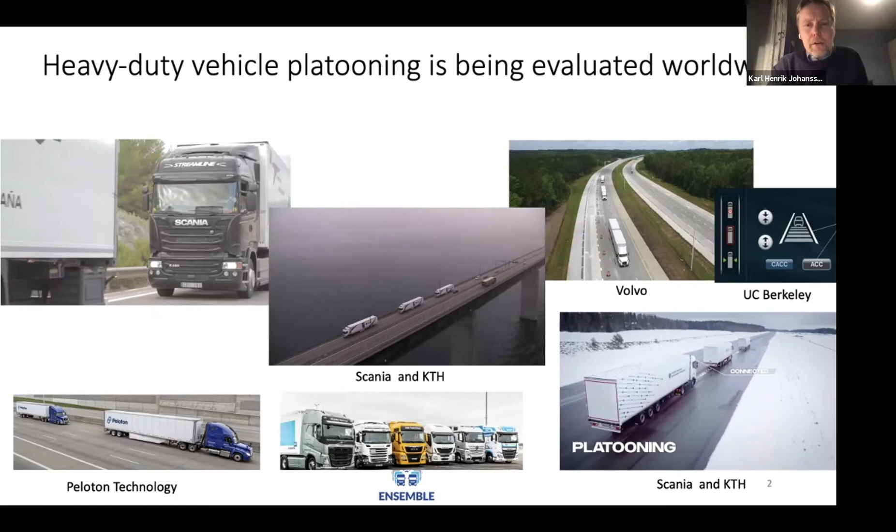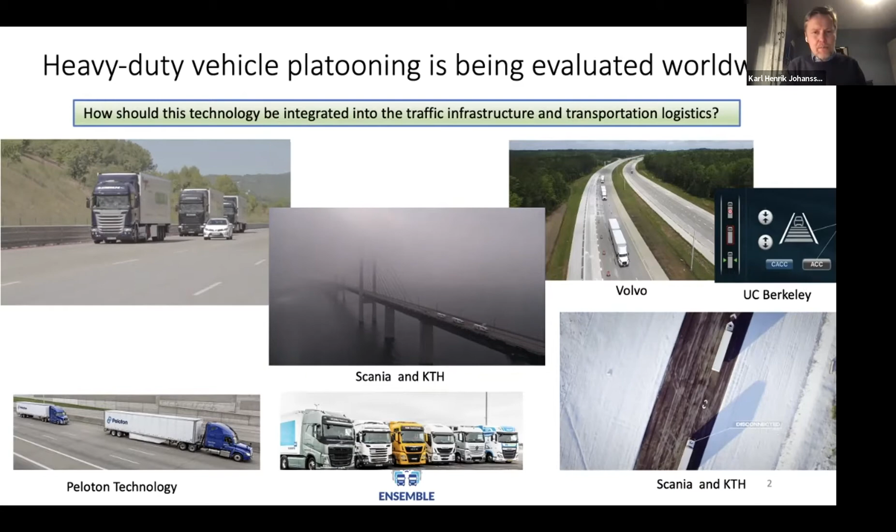This will have a little bit of relation to what Alex also talked about: how can we regulate traffic using connected and automated vehicles? The starting point for my presentation is a particular technology and a particular type of vehicle, namely trucks. As everyone in this audience knows, truck platooning has been developed for quite some time. Basically all truck manufacturers around the world are working on this technology and have been demonstrating it. We've also been interested in that for a number of years, not only the issues about how to get the trucks close together and run at high speed to save fuel, but also in going further to think about where we go from here. So now we have that technology - how should that be integrated into the traffic infrastructure? Basically, how can we use that? That would relate to the previous talk. Can we use these connected trucks to control traffic, and how should that be done? I'd also like to talk about the broader perspective, because trucks are there to transport the goods we are consuming, and that transportation logistics system changes with this type of technology - what scientific challenges do we have?

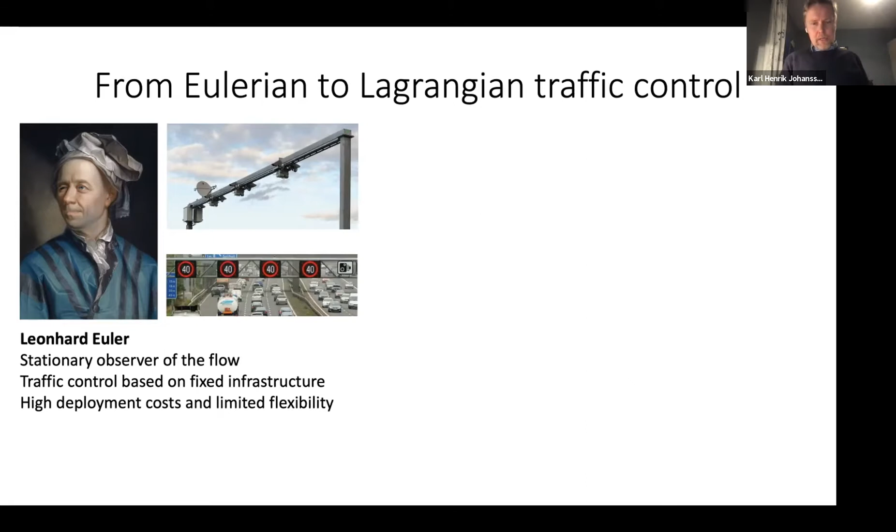Let's come back to the basic problem of traffic control. What we have today is mainly this type of Eulerian control, where we have stationary observers of flow and traffic is controlled from a fixed infrastructure, like digital road signs or ramp metering. What we envision now, and where quite a few groups are working, is to think instead about a Lagrangian approach, where traffic control is based on mobile sensors and actuators.

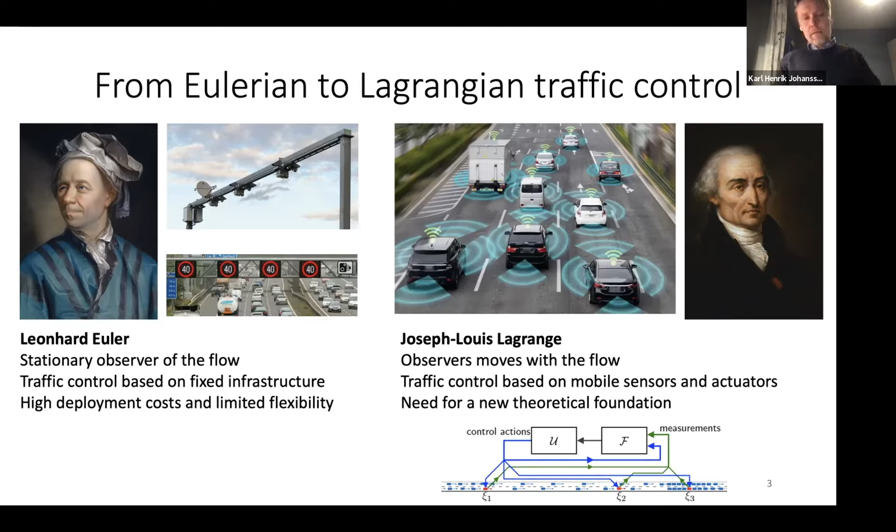In these situations, we envision having access to certain vehicle information, which gives us the possibility to estimate or learn about the traffic state, and we can use that to actuate. What's particular here is that I'm not interested in connecting every vehicle or any type of vehicle - I'm interested in trucks, because it's a very particular type of vehicle that comes from a number of manufacturers and is driven today by professional drivers. This is a type of technology deployment that might actually happen, as argued by many, faster than some of the other automated techniques we see.

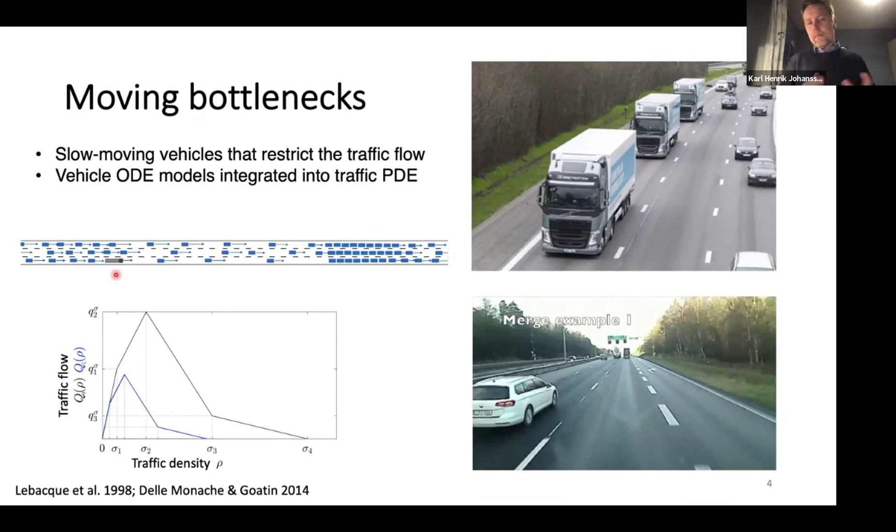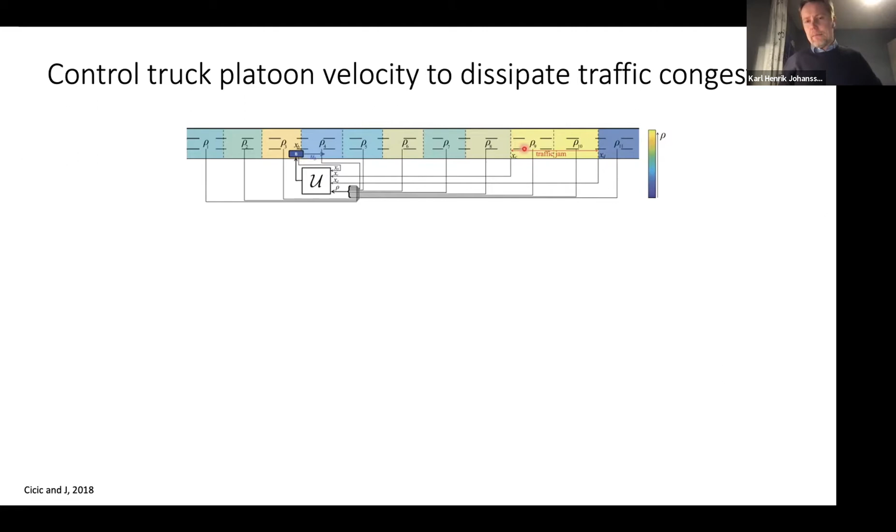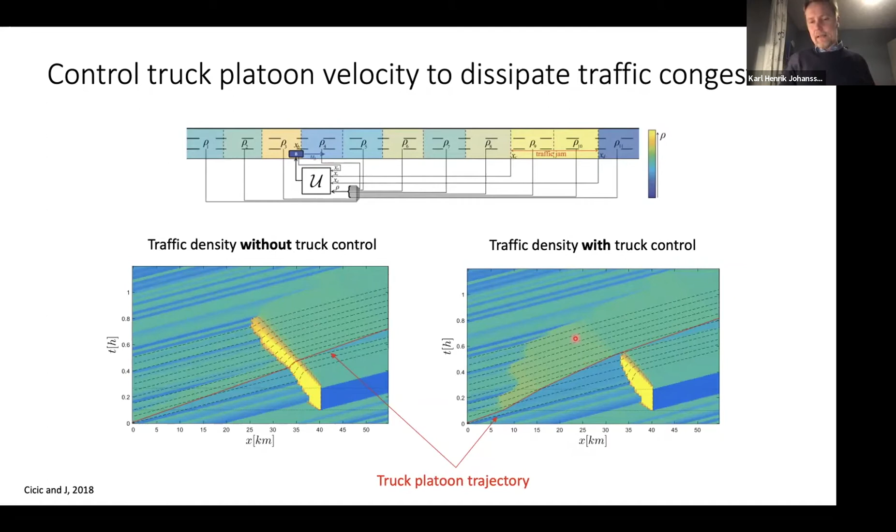The question we'd like to ask ourselves is: we slow down this traffic, but did that do something good or only something bad for that traffic? Basically, how did we affect the traveling time for the rest of the cars? To the left, we have the case without our control deployed, with a congested area here to the right, and in this case we have a total travel time increase of 38%.

With the controller in place, we are shifting congestion, basically smoothing it out over a bigger area. The consequence of that control strategy is that we now have an increased travel time compared to no congestion at all of only 8%, which is of course much smaller than the 38% before.

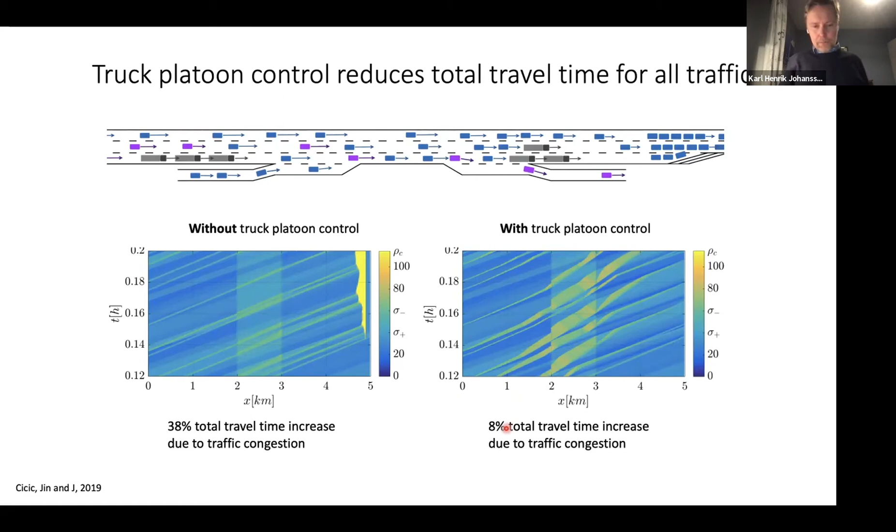In this particular case, we assume we have perfect information, but in practice we would not have perfect information. So another thing we are looking into is how we can actually estimate traffic state reconstruction based on this type of dynamically assigned vehicles, these trucks or other vehicles that are traveling, and how they can be used also for doing control in this setting.

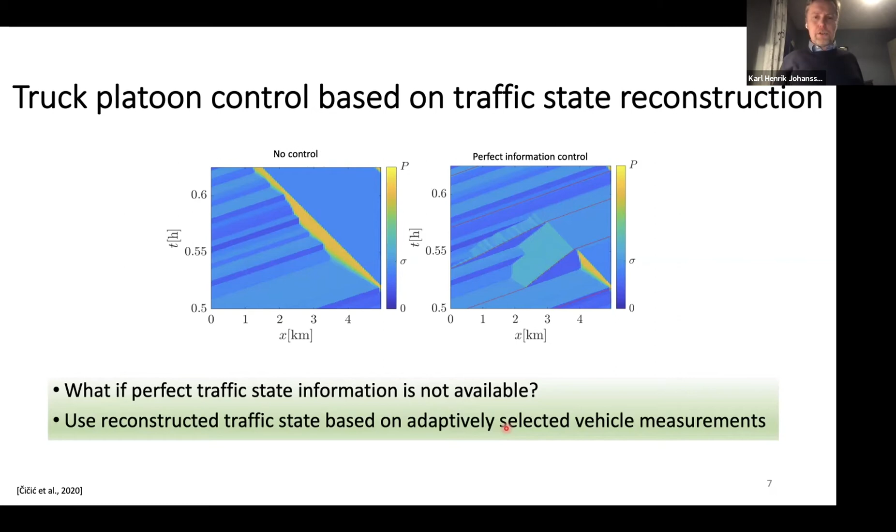Let me just illustrate a little bit the idea you see here. In this case, we have probe vehicles, which I indicate in red. They are traveling here.

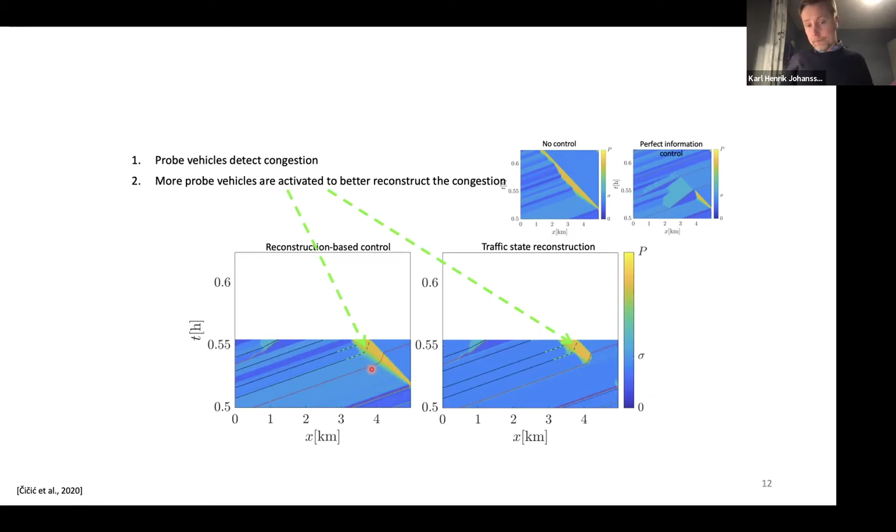If this is the first probe vehicle, you see in the traffic state reconstruction diagram to the right, I don't know that this is a congested area because there was no probe vehicle going between these two vehicles. So this yellow area I didn't know about, but when this second probe vehicle comes in, I would be able to detect that there might be something going on in this area. So by that, I could switch on more of my sensors, more of my probe vehicles, and build up a better estimate about the traffic state here.

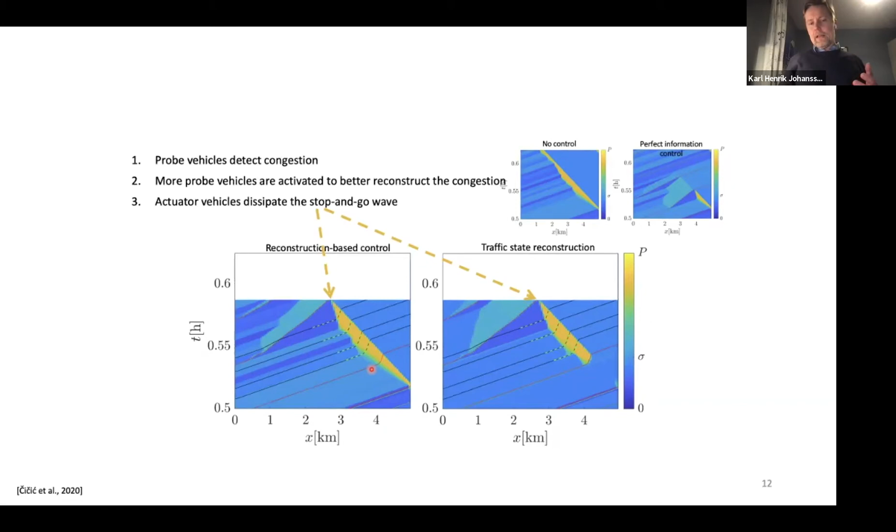If I then come to the conclusion that there is actually a jam going on, I could then also start acting with these trucks that are moving through the flow that I have, and I can continue doing that. And then when there is no jam any longer, I can switch this off.

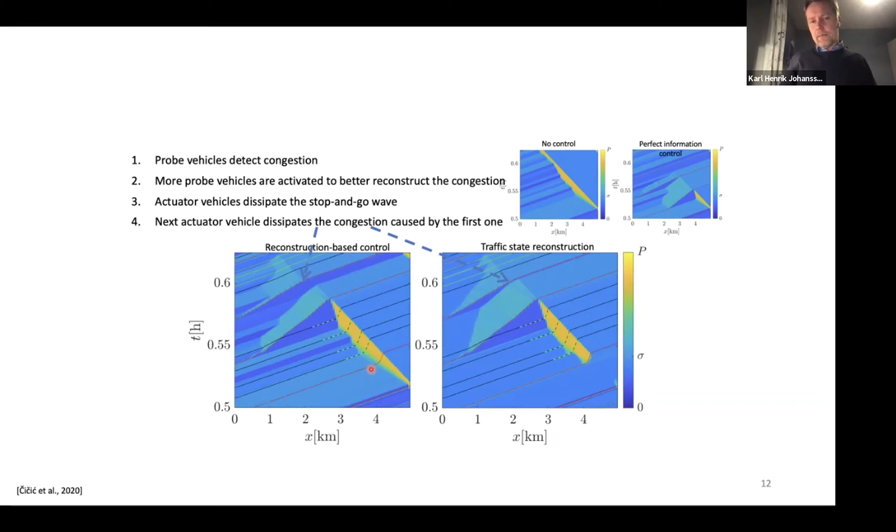So let me now, with the last couple of minutes here, zoom out a little bit from this picture. In a sense, what I try to argue here is that we could start using these trucks to control traffic. If you want, you can think about that as a kind of service, some sort of mechanism, since we have a large number of these long haulage trucks deployed in the US—there are a few millions.

In Europe, there are 2 million traveling around. So if we see them as an asset in our system, we can think about what type of services we should develop. So what we've basically talked about now would be a type of service to society which would improve traffic conditions, and in that sense also reduce environmental pollution and so on.

But we can also think about this from the viewpoint of cooperation. So we can think about the trucks that are traveling across Sweden in this case, and how this now could be cooperating in order to save energy or to save the amount of human interaction that is needed when these truck platoons are traveling.

So there is a lot of interesting aspects in that problem that we and others are considering at the moment. I won't have time to go into it, but maybe in the discussion we can talk more about them.

One aspect here, let me just mention, is about the data. If we think about the type of data that we are sharing with Uber or other types of traffic means, we basically allow to share our intention. When it comes to business data or transport data from these fleet owners, it might not at all be so obvious that you would be willing to share that even with some sort of centralized entity. So one might want to develop this type of cooperation algorithm with guaranteed levels of privacy, which is something that we have been studying.

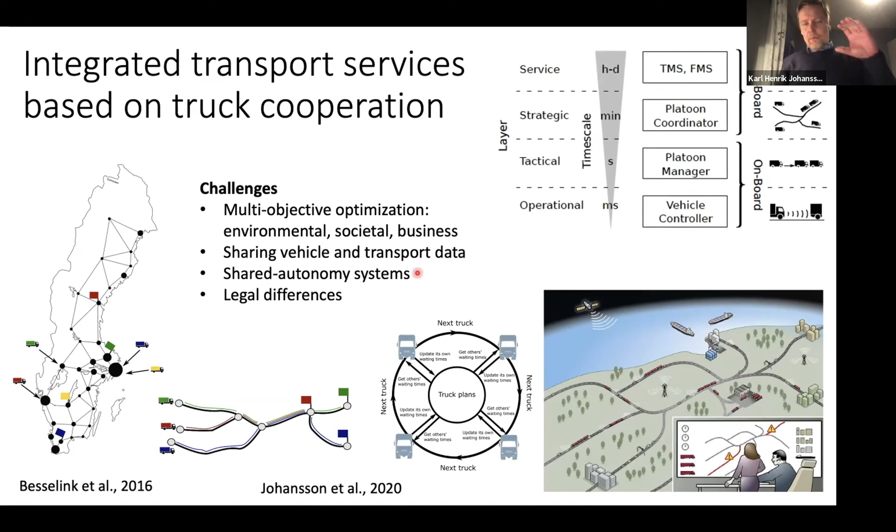There is also, when we talk about deployment, a very interesting aspect about autonomy. So what level of autonomy should we expect, and at what level in this hierarchical system that I'm describing? So when we come even down to the lower level, and if we're thinking about a fully automated system, there are few of us who think that we will have these self-driving cars or self-driving trucks in the near future.

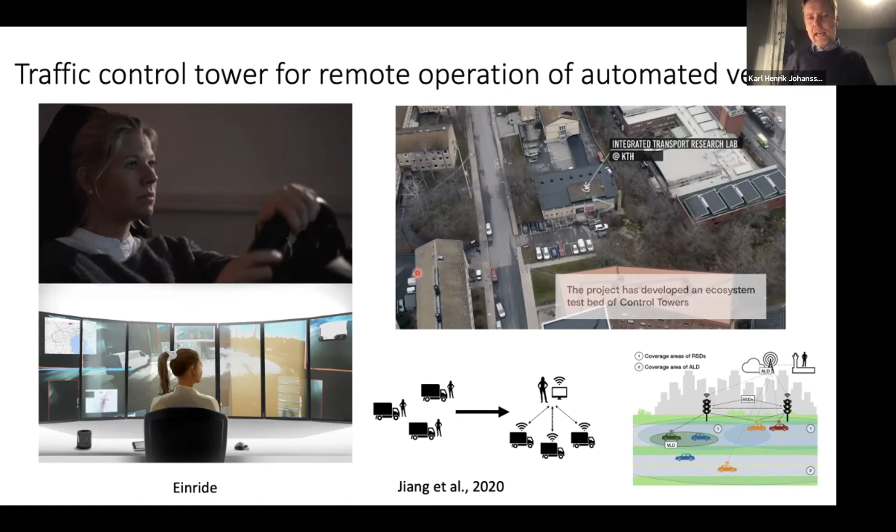But another piece of technology to support this type of architecture is the concept of a traffic control tower, inspired to some extent by the air traffic control tower. For instance, to the left is what a startup here in Sweden, Einride, is developing right now, where you have remote operators who help under certain particular circumstances when the truck needs some support.

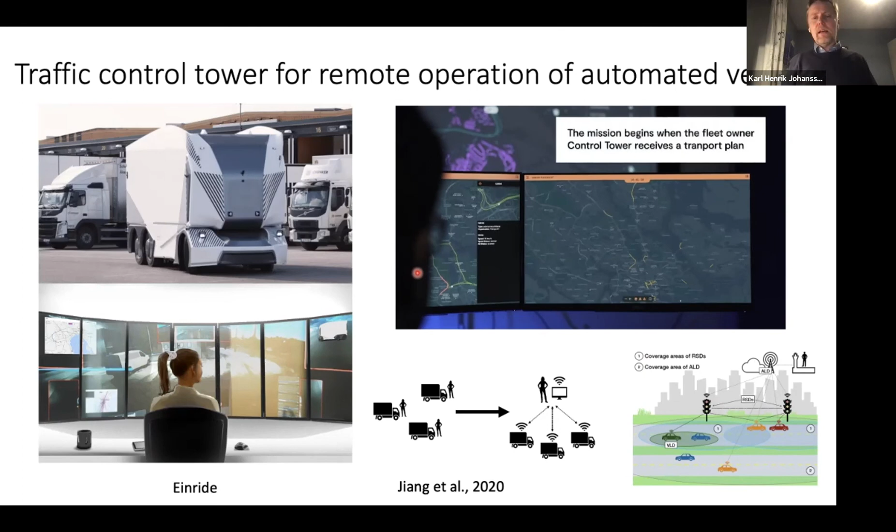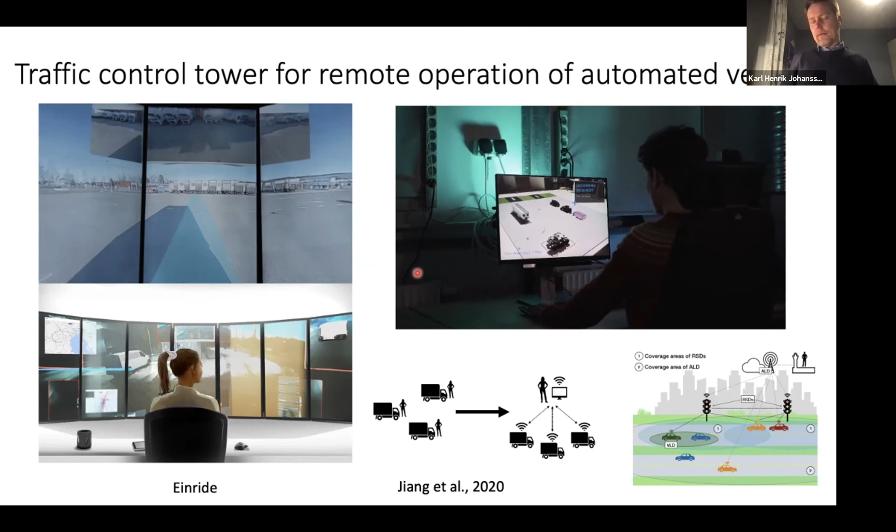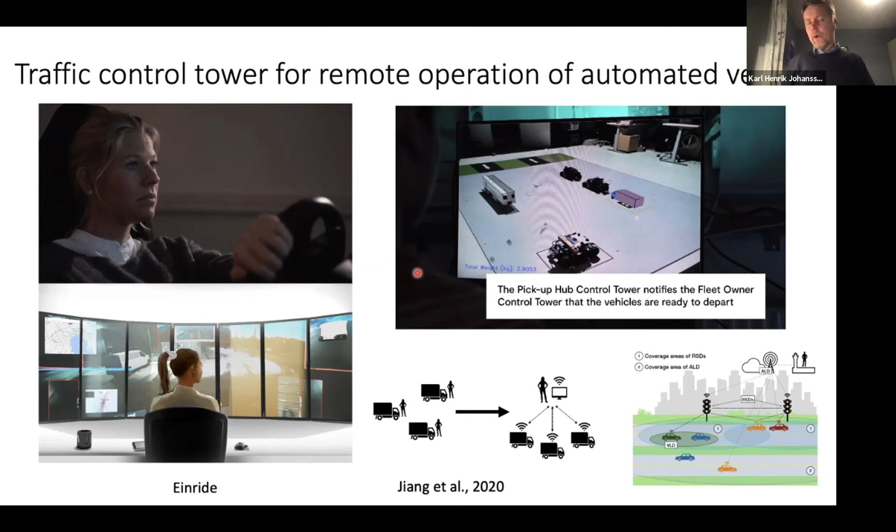In this case, in this truck there is no driver at all, but in other instances there might be drivers in some of the vehicles but not in others. And this poses quite some interesting challenges: basically, where should the intelligence reside? Where should the artificial intelligence in this system reside? And where should the human potential intelligence here be integrated, and when?